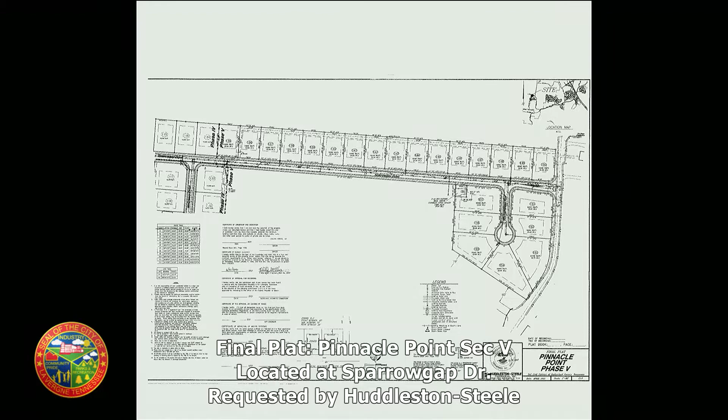This is the proposed layout, so this is the final plat. As you know, this property is stretched out north to south, so the main street there that's proposed will run north to south, and then there's a cul-de-sac. When you turn in off of Lake, there'll be a cul-de-sac immediately on the left with these 7 lots. And then they are proposing a stub out to the southern end of the development. By the way, the north arrow is here, to the right, so north is not up.

Here's a closer view of the proposed layout, and this is the modification of the existing detention pond that the applicant has provided. All of this, of course, is also in your packets tonight.

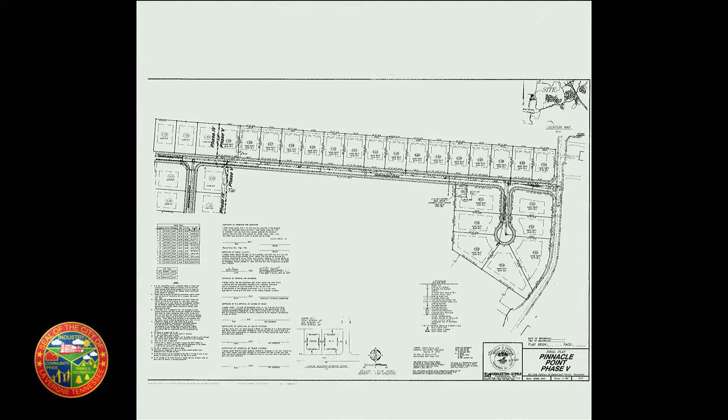The planning comments have all been addressed over the last several months at workshops, and I know Mr. Leach, the city engineer, had some comments, so I'll turn it over to him. Thanks. Thank you very much, sir. Mr. Leach, please, sir.

As you can see with the sheet Mr. Logan had, the engineer did submit his sheet indicating that they intend to basically restore the pond to fairly close to what its original design volume was, and modify the outlet structure to lower the discharge relationship in the pond. That's the height of the water in the pond, which is what's causing the surcharging there at Benjamin Franklin. So essentially, by getting the water out of the pond faster and taking back the storage that's been lost due to sedimentation or not being built correctly, it should, based on the engineer's calculations, basically restore it to functionality.

Very good, thank you sir. Any questions or comments from the board? Is there a representative here this evening for this project? Come to the podium and state your name and address.

Enoch Gerald with Huddleston-Steele Engineering, and Mr. Scott Butler, the developer, are here as well. Thank you, sir.

Mr. Logan, you indicated in our packet we had some information on the pond, because I don't seem to have it. Does anyone else have that information? So we don't have that information. It's the same information from the workshop, so maybe Mr. Enoch didn't see it necessary to resubmit that.

So we're not contributing to what, if there's flooding at Lot 5 Martin's Bend. And so what are you gonna do to keep the pond from collapsing back in to cause the same problem? They're gonna stabilize it with matting. It's not just seed and straw, the erosion matting that's stapled down with seed in it and growing grass back. So they're gonna stabilize that pond to keep it from eroding, and I don't know that it's really some of the silt that's come from other areas where we're cutting out. But if we go back behind some of the lots, we'll be affecting the lots, and we're staying away from the lots where we're doing our excavation. So we'll be stabilizing that slope, keep it from eroding.

No other questions? Any other questions? I have probably more than a comment than a question. I sat here at the last meeting a little quietly and listened to everyone, and I see this as being a reoccurring issue.

I mean, Pinnacle Point is having their issues. I've lived in Woodsong 17 years. We had no issues there until other neighborhoods were built, just like the Vineyards had no issues until our neighborhood was built. An extra drainage pond was even added to Woodsong that wasn't even required because of flooding. Now, our ponds are flooding because of Portico. All their straw and everything is coming down. I'm facing $10,000–$15,000 in water remediation to keep water out from under my house, like multiple other neighbors in my area. So the minimum that we're requiring people to do is not working. I mean, this is a serious problem that we have to address in some way.

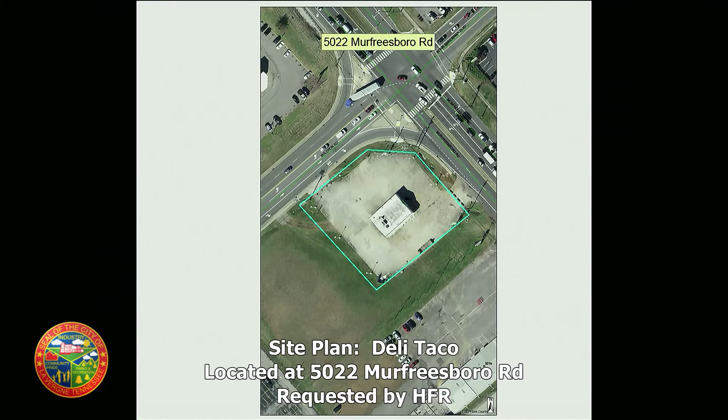Mr. Logan, let's get some energy going here. Thank you. This is at the corner, site plan approval requested at the corner of Murfreesboro Road and Waldron Road. This address is 5022 Murfreesboro Road. So we're talking about where the red dot is here, which right now is just a sea of concrete when you drive by. Here's a closer look. This is a former gas station from a while ago, and this applicant has decided to demolish this building that's standing there today and to build a new structure with gas pumps. It is a gas station, by the way, although it's named Deli Taco.

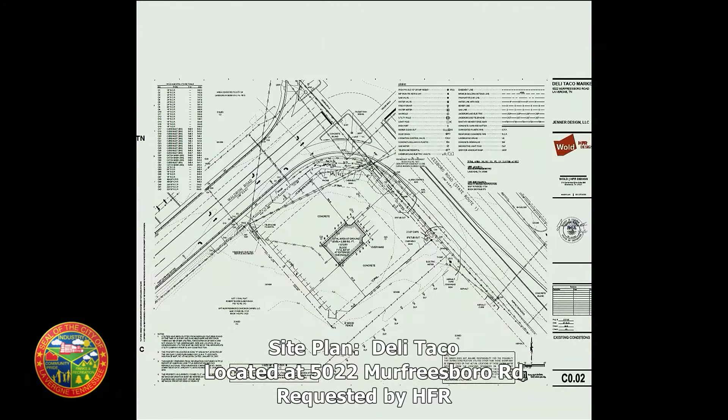So moving ahead to the site plan. This is the site plan that was submitted at first, so I've kept it in the PowerPoint, and if we need it, we can go back to it. So you'll notice on the new one they submitted, there's some changes, although very minor. One of them is this apron at Murfreesboro Road, which was not on the original site plan. So this is the store, convenience and retail store. It is 5,587 square footage that's proposed.

And they are aware that they have to be fire sprinkled, so that's been discussed from day one.

This is the gas canopy here on the site plan with the proposed gas pumps. They are proposing a total of 16 vehicles can be fueled at one time.

The parking there is next to the store and then wraps around the store, and then here at the rear is the dumpster enclosure for the trash. You'll see on the architectural elevations it is actually incorporated into the dumpster enclosure, same material as the exterior wall, so it's incorporated into that wall.

I'll let Mr. Leach speak about detention later, but let's go to the architectural elevations.

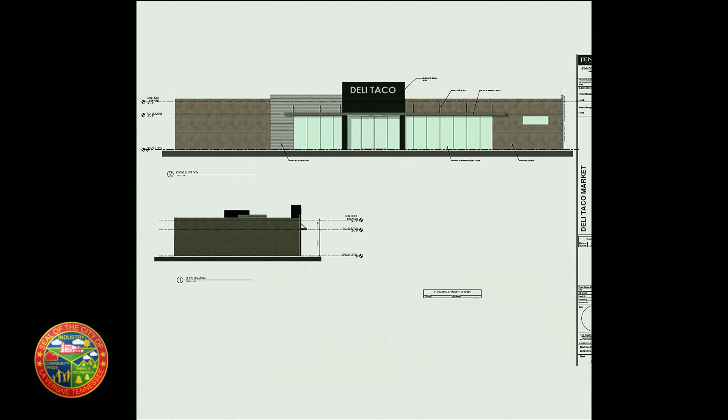So this is the front of the proposed retail store, and they are proposing to use brick on the outside along with stone and some aluminum composite for the trim.

They are also proposing ample landscaping, as you can see in the plans that were submitted. And again, the side elevation is more brick, as is being proposed.

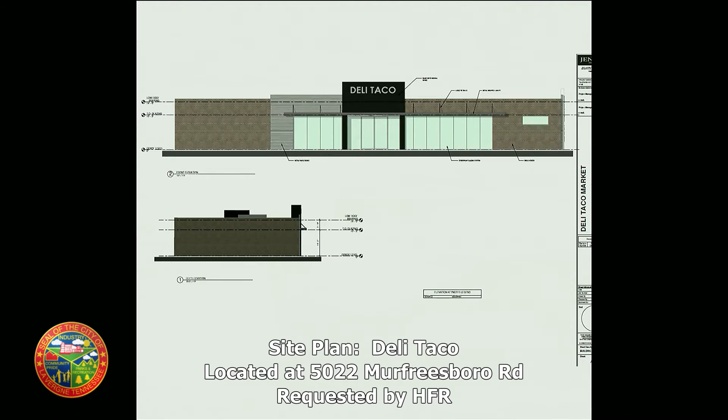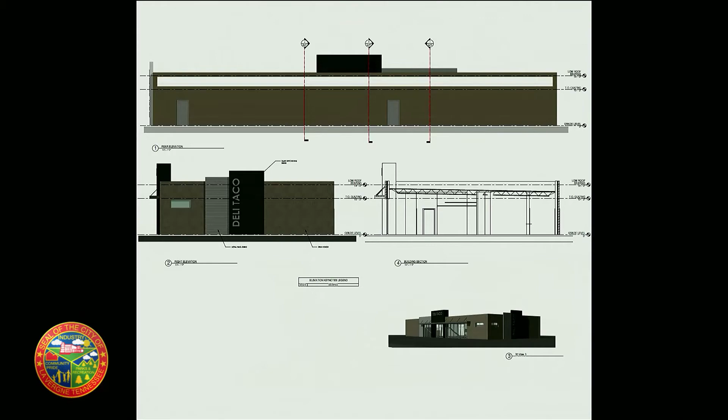They have taken care of most of the planning comments, and it's my understanding that based on discussions from last month and at the workshop, that the former tanks that are buried at this site have already been removed. You'll remember that discussion from 2 weeks ago at the workshop.

That completes the report for the planning side, and I'll turn it over to Mr. Leach. Thank you, sir. Mr. Leach? All my comments have been addressed for this site. Very good, thank you. Any questions or comments from the board?

Mayor Cole? Need the applicant. Oh, will the applicant please come to the podium, state your name and address for the record? Jim Gillum, HFR Design, 214 Centerview Drive, Brentwood, Tennessee.

Thank you, sir. So, first off, I know this was a lot of discussion at the workshop. Can you walk us through what changes you made with the landscaping plan, specific to the adjoining property?

Right, so it was requested to add some shrubs along both the property line there between the Parthenon and I think still a fireworks stand on the Murfreesboro Road side. So we added a staggered row of evergreen shrubs, really from building to right of way.

Okay. And there's, with the landscape on the exit portion as you're coming onto Murfreesboro Road, that landscaping won't restrict views for anyone trying to pull out? No, sir. In fact, there was already some landscaping right there at the entranceway, and of course, staying off the state right of way there, we are not getting into any kind of site visibility issue there.

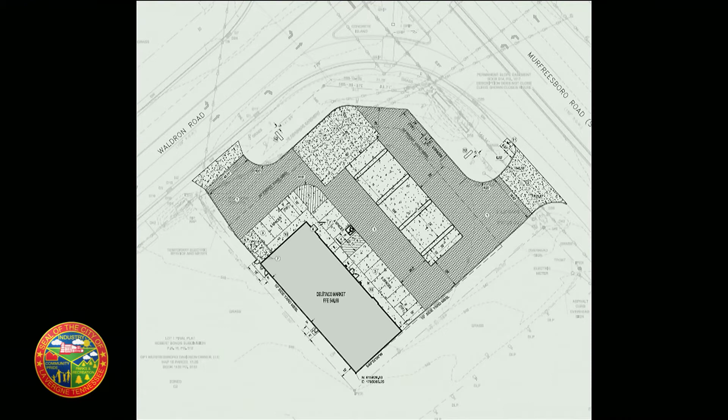So that's where most of their deliveries and everything will be going, to the dumpster and out through the kitchen, that's the dish area in back. So I guess the northwestern door you're talking about, if they're at the very corner of the building, it will have access to that pad where they're not having to walk into a bunch of grass. Yeah, you come out right there. Okay, that's all connected with concrete there. Thank you.

Typically the signage is a separate approval for the city. It's not part of the site plan, so I don't check signage at this level, because BOZA takes care of that. So maybe that should be an internal discussion about how we're gonna approach signs. The short answer is no, because the city has a separate approval process through Mr. Randolph's office where they permit signs.

So with the explanation that the architect has given, do you anticipate receiving product through that kitchen door? Receiving, you mean like receiving deliveries? I believe they just come through the front door. From what I was told, they come after hours, like early in the morning or late at night, but I'm not exactly sure on the timetable for deliveries.

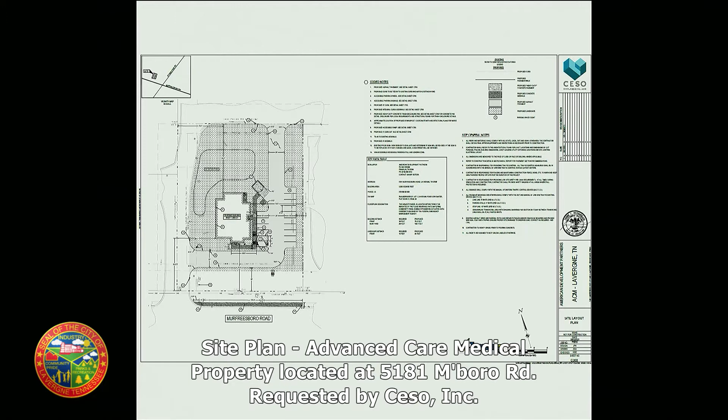Let's move ahead to the elevation—these are what was submitted by the applicant. Again, they're using a lot of brick and stone, and this building, along with the plasma center later, has a parapet at the top. The parapet makes the building look taller, even though it's not really taller, but it gives the visual effect of a more impressive building. You'll see those parapets on the architectural elevations—it's a common practice with commercial developments.

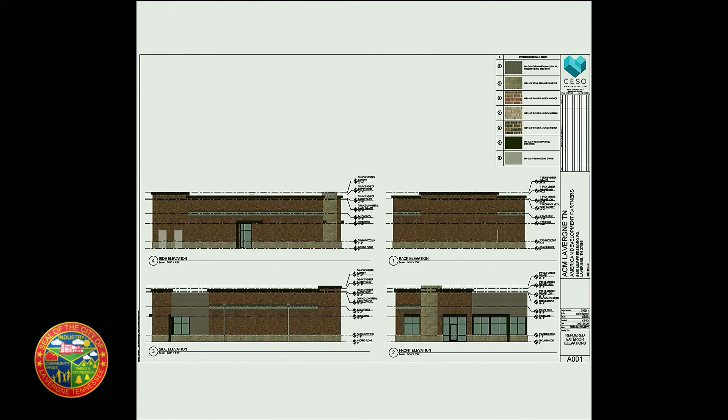Anyway, this clinic is 3,550 square feet, so it does not have to be fire sprinklered—that's one issue taken care of. And all the planning comments have been taken care of as well over the last couple of months. I don't think Mr. Leach has anything left, so we'll be happy to answer any questions. Thanks. Very good, thank you, sir.

Is there a representative here this evening for this project?

Name and address for the record, please, ma'am. My name is Kelly Hyatt with CESO, 216 Centerview Drive, Suite 150, Brentwood, Tennessee.

We did take a look at the comments, staff comments and some of the comments y'all had last month as well. We added some landscaping along Murfreesboro Road, including a shrub row and a tree in the bottom right corner. We also added trees on the back parking side. I wasn't clear on staff or planning commission comments about whether the trees were requested on the left side or the back side, but we didn't want to risk degrading the detention pond by putting trees too close, so we put them on the back side.

The other comment planning commission had requested was to look at the location of the front drive. We looked at that with our traffic team and felt that compared to McDonald's, the trip generation for this type of clinic would be much lower than a restaurant. The other aspect they looked at was conflict points. Anybody turning onto that road to access our site would be able to make an immediate turn, with no parking or people making maneuvers or pedestrians crossing that would slow down traffic and cause a backup. They'd be able to get all the way to the side before having to pause and adjust for traffic.

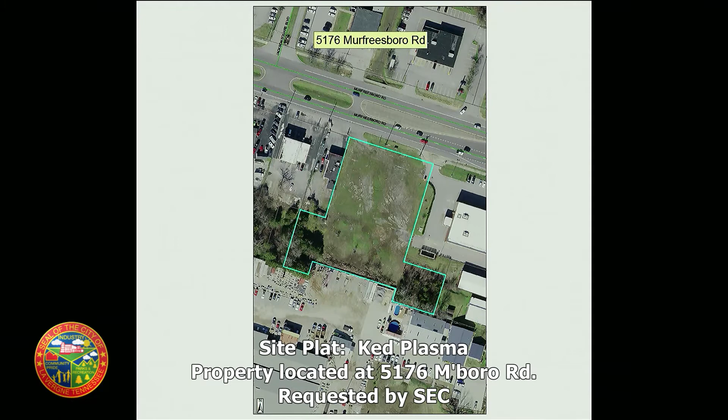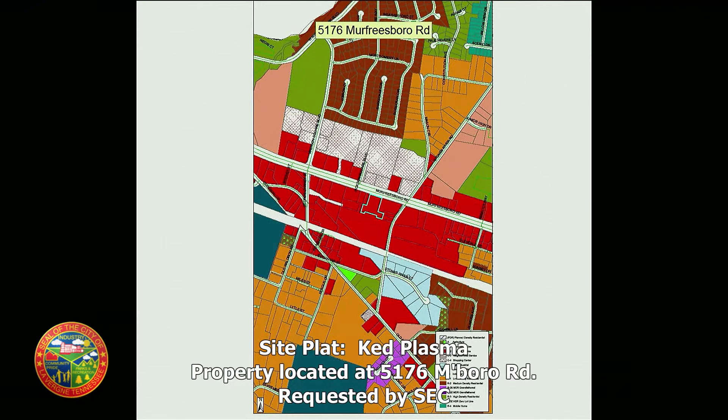Currently this property is vacant, and they are proposing a one-story building, which would be KED Plasma. The zoning map shows that everything on this side of Murfreesboro Road all the way to the railroad track is zoned commercial already, which is C2.

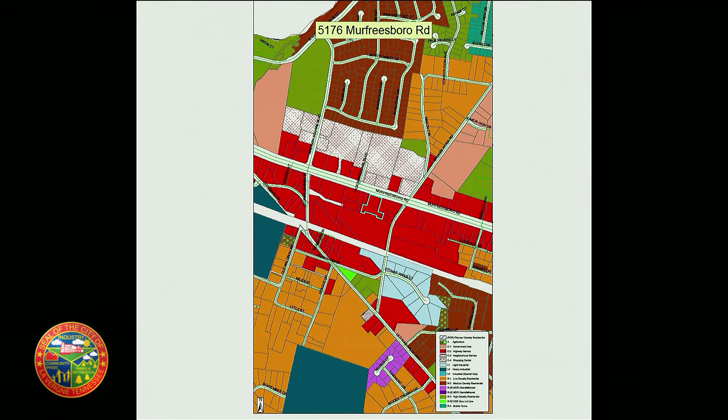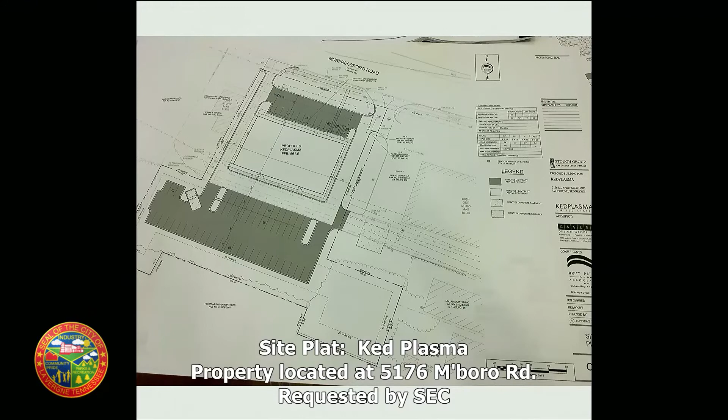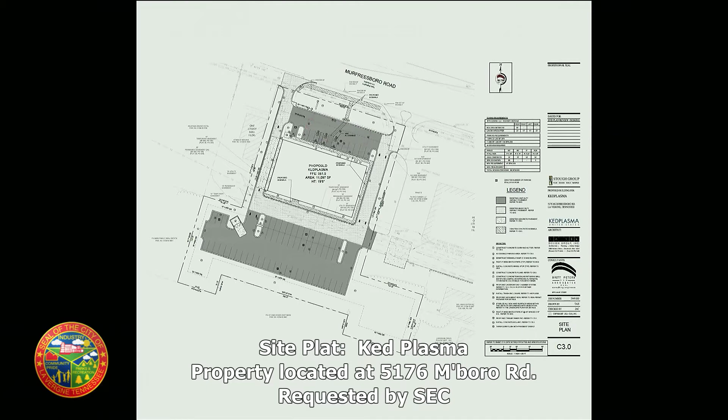This is last month's, or two weeks ago's submittal, so I've kept that and the elevations from two weeks ago. This is the resubmittal site plan. One thing you probably noticed is they changed their elevations since the workshop, although the building layout on the site has not changed tremendously. There is parking, as there was two weeks ago, parking in the front, parking in the rear. This red dot here is the dumpster enclosure, where they're proposing to have that.

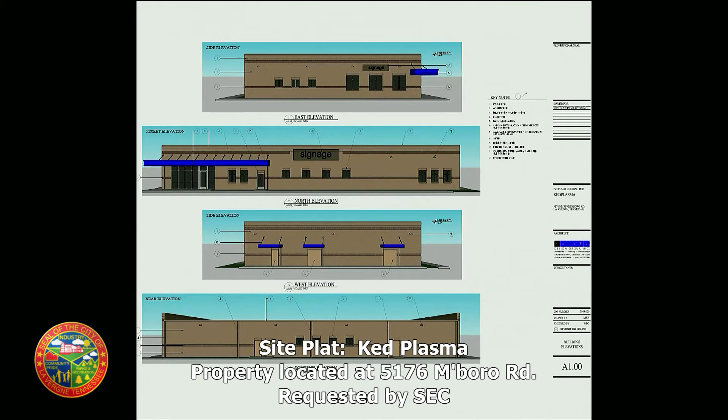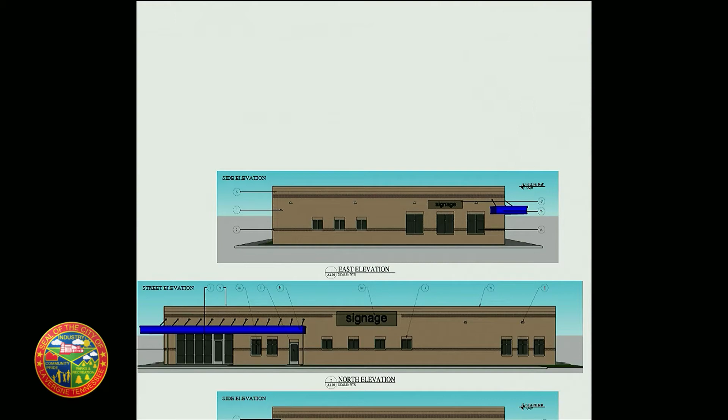These are the new elevations that were submitted: north, south, east, and west, so we'll break those down. This is the east elevation, north and east, and the north elevation is what they've also labeled as the street elevation. So this will be the view from Murfreesboro Road, the north elevation.

This blue canopy-like structure has been added since two weeks ago, so there's the front view. Then here's your side, facing Smyrna, so it'll be the southeast side of the building. They're calling it east, but this building, as everything is on Murfreesboro Road, is skewed away from true north since Murfreesboro Road does not run north and south.

Here's the other two elevations, west and south. This is the rear. Again, you can see the parapet on left and right that they've designed for this building. Then this is the other side elevation, so it'd be west here, but it's actually northwest, or the Nashville side of the building. They too are proposing almost exclusively brick, and that's not a change either from two weeks ago.

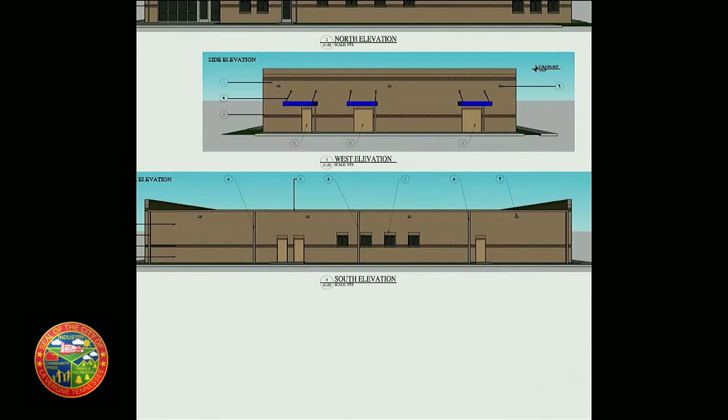All the planning comments have been addressed. One thing I didn't mention, they're proposing 69 parking spaces where 44 are required, so they have ample parking for sure. And there's a couple comments from Mr...

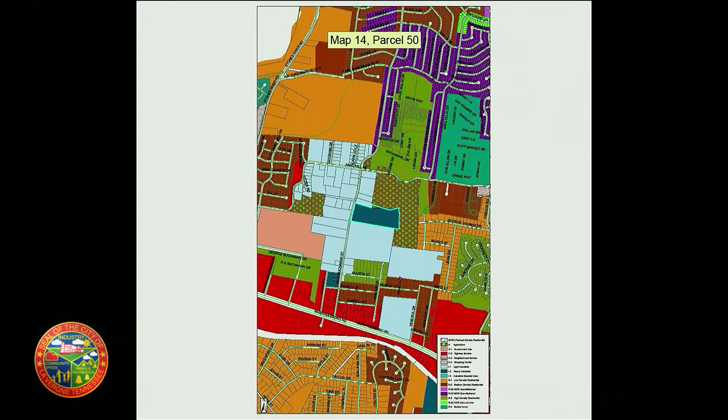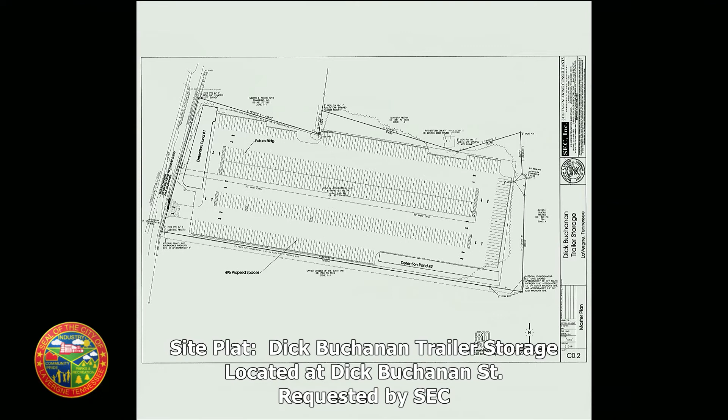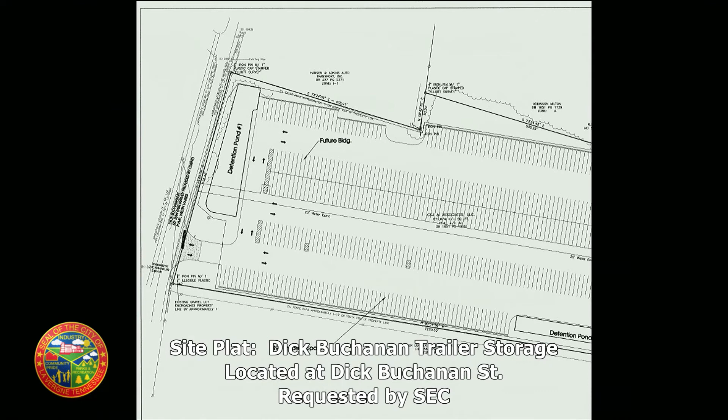Zooming in, you can see the arrangement and the aisles for the parking that they're proposing. This is the western side of the parking lot they're proposing, and the next slide is the eastern side. You see detention pond 2 is proposed here along the south border, and detention pond number 1 is along Dick Buchanan at the west end of the project.

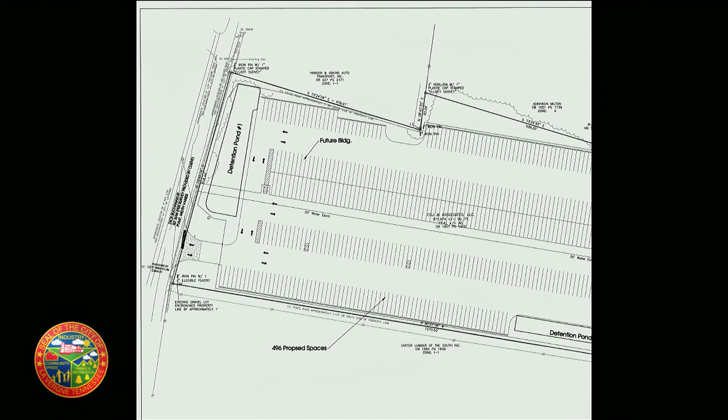So there's no building proposed at this time, which you probably remember from 2 weeks ago. They're only proposing trailer parking and storage at this time. I know there was a long discussion 2 weeks ago about lighting, so they have addressed those issues with lighting and safety. Of course, there's no architectural elevation since there's no structures being proposed, and this is not in any overlay district as well. So for technical items, there are none left - they've all been addressed by staff. So happy to answer any questions.

Thank you, Mr. Logan. Is there a representative here for this project? If you would state your name and address for the record. Zach Woolpart with Site Engineering Consultants, 850 Middle Tennessee Boulevard. Thank you very much. Joe Delemus of North Star, 782 Melrose Avenue, Nashville.

Thank you very much. Questions or comments from the board? I will start - did we get the internal fire protection added? What was it? That's a board request. There's not a requirement for it because there's no structure to protect, so that's why it was not a technical comment, and that's why staff have not addressed it. But I don't believe they added anything for it.